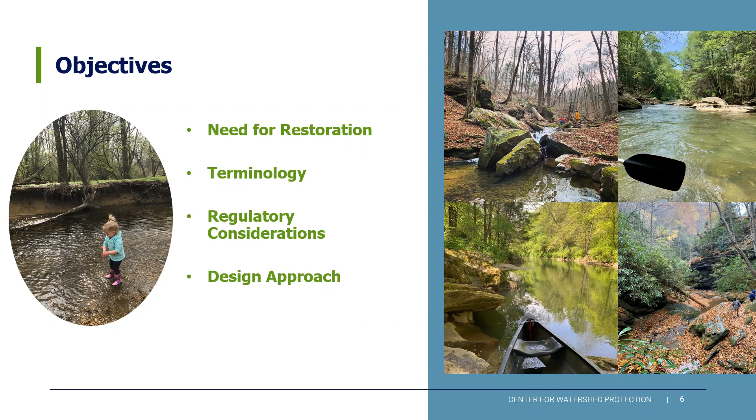And so our speakers will talk about the regulatory considerations and the design approach, what these types of projects look like, and what sites they might be landing on to suit a mitigation bank project.

And finally, to introduce our speakers, Dave Gorman is a water program specialist at the Pennsylvania Department of Environmental Protection in the Division of Wetlands, Encroachments, and Training, Bureau of Waterways, Engineering, and Wetlands. He's responsible for providing permitting and technical expertise on a wide range of issues involving waterways, wetlands, and floodplains. His recent work is focused on aquatic ecosystem restoration, mitigation banking, and aquatic resource research and monitoring. Dave has worked in the division since 1993 and has a BS degree in the biological sciences from Clarion University in Clarion, Pennsylvania. And I will go ahead and introduce Ward too, but he will be following Dave's presentation.

He's currently employed by Land Studies and Century Engineering, and is a professional engineer licensed in Pennsylvania and Maryland with over 30 years experience in stream stability and restoration. He's worked extensively in Maryland and Pennsylvania, completing designs and the implementation of stream and valley floodplain restoration projects, including watershed scale mitigation banks and those impacted by legacy sediments. These projects include waters with drainage areas over 30 square miles to smaller valleys with slopes greater than 20%. So we have two great experts that will be sharing their information today, and hopefully answering some of the questions that Allison posed earlier that some of the conservation partners are curious about.

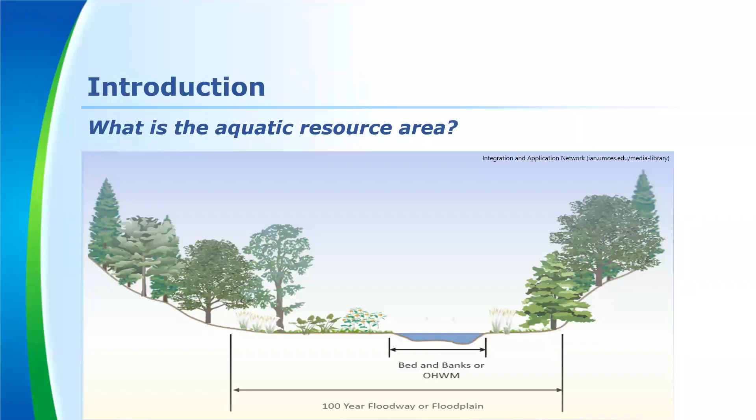So I like this slide because for a lot of people that aren't familiar with it, this has been a very difficult task for some people to grasp onto. We are in the process, or have been. It's been much more protracted, I think, than our program would like, or any of us would like. It's going on 2 decades now. 2/3 of my career has been spent dealing with this, and a lot of recalcitrance in understanding and moving to the trajectory or direction where we want people to move in terms of the science and the design approach.

But we're shifting away from just evaluating the conditions on the ground as a basis for requiring or defending or demonstrating the need for work. What we want to do is develop comprehensive restoration projects that go through an evidence-based approach. And one of the key factors to this process is identifying historic alterations to the valley. And it's not just the stream channel. In many cases, stream channels aren't even in the location they're supposed to be in. They're on the margins of the valleys. They may even be outside of the original floodplain, and they may be perched up on the valley wall in many cases. So understanding that historic context, the alterations, this is really the basis for our process.

And it's what we put bankers through. They've got to go and do good geotechnical work, investigative work, historical work, to understand what's happened to the stream and propose an approach that will address those degradation elements in order to meet the level of crediting to be awarded credits for restoration or rehabilitation. One of the principles of this is understanding the historic or pre-alteration valley, that paleo condition. I'll talk a little bit about that later, and I'm sure Ward will too. That really is important to understanding how the resource has been altered and the underlying causes as well. But it is a critical element to addressing and developing a comprehensive restoration plan for sites.

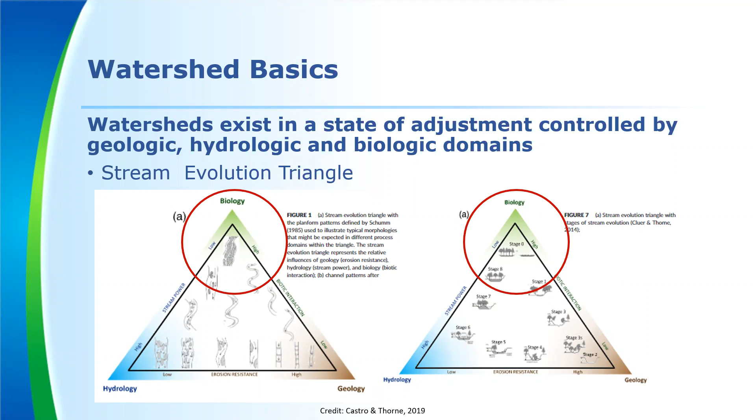That's huge. You're increasing by a third the ability of that stream bed to resist shear stress conditions that would normally cause transport of materials downstream. So they're stabilizing habitats, gravels, and smaller particles. That's a big deal when you start looking at habitat and functions.

So when we evaluate these projects, banking is comprehensive. The goal is to develop comprehensive projects that address the watershed and the underlying problems within a watershed. So we're looking at systems. We're looking at developing resiliency, and how you develop resiliency is through redundant pathways. Obviously, diversity and conditions, that can be a wide range of things. We're looking for diversity and ecosystem stability.

And all of these things are reflected in the paleo environment and the historic conditions. If you do the geotechnical work and the past work to look at what that system looked like before it was altered, that can be really informative. We're looking at retentive systems. These things retain carbon, nutrient retention, processing, transforming nutrients. So the nitrogen might come in inorganic, it leaves in a biological form, which is a completely different animal when it comes to aquatic resources.

Fine-grained sediments are retained, more variety, more heterogeneity of sediments. So you have more diverse habitats, more diverse conditions that a much wider range of biological communities can survive and thrive in. A big issue is retaining groundwater and baseflows. Reestablishing the hydrodynamic connectivity is paramount. That's where it all starts from.

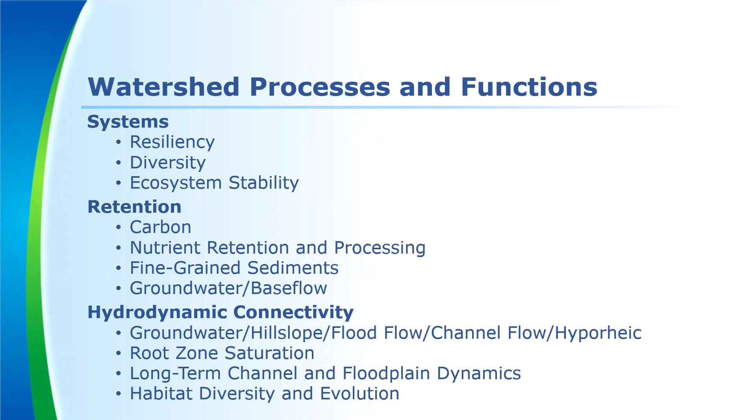The U.S. Army Corps of Engineers Research and Development Center, or ERDC, has identified over 60 functions associated with fluvial and stream systems. So there is a plethora of things related to fluvial systems, and most of those functions are outside of the stream channel. I hate to tell people that love stream channels, but it's about the broader fluvial system. It's not just about that in-stream, picturesque thing that everybody likes to drop their fishing line in. But we're also looking at long-term channel and floodplain dynamics. As I mentioned, diversity and evolution of habitat is really important.

Hydrodynamics, this is where it's at. When I evaluate a project from a banking proposal, these are the things that I really focus on in understanding how have the hydrodynamics been altered? How does the proposal address those alterations? And is it going to reestablish these?

I say they're on 3, it's actually 4 axes. There's longitudinal, horizontal, and vertical. There's also hill slope, which is kind of an independent process in smaller headwater streams. I don't have it listed on here. I think I included it in the horizontal or vertical. I can't remember which in the presentation.

So these are the underpinnings of evaluating degradation, alteration, and a design proposal. This forms and significantly influences almost all of the major processes associated with a fluvial system. And if you're not undoing the damage or the alterations done to these aspects of it, then your project is not likely to have the outcomes that you're expecting, which is full restoration.

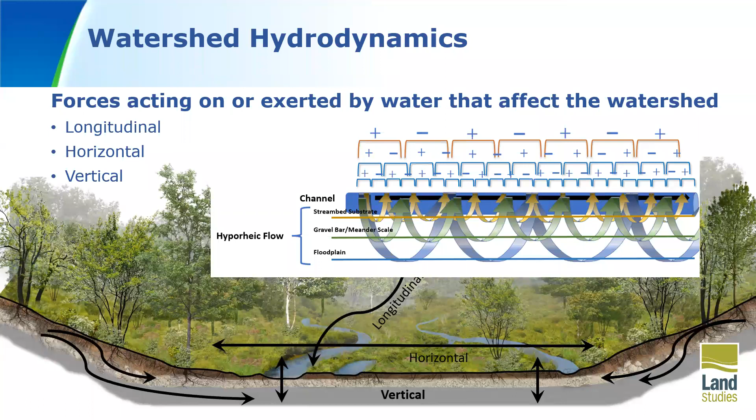I developed this to try to show you the complexity of hyporheic flow. People often think of hyporheic flow as just a vertical movement of water, but it's not. There's a huge horizontal and longitudinal spatial complexity to this. And this graph represents those different upwelling and downwelling points along and across a valley.

So you can think of these arrows in a two-dimensional space of along a valley and across a valley. You get a lot of different combinations of downwelling of water and upwelling of water. These are the biogeochemical hotspots that really transform nitrogen. And without this kind of complexity, you have a much reduced capacity to remove nitrogen from the system.

I remember most of the nitrogen, I know the models all use edge of field, edge of stream. In my experience and based on the science I read, this is all coming from the groundwater. The nitrogen sources are in the upwelling of the groundwater from the sides of the hill slopes or the broader valley walls. So if you don't have these complex processes restored and in place, you're going to have a much reduced capacity to deal with nitrogen altogether.

It's pretty much just going to keep passing down valley flow in the stratigraphy or in the groundwater that's not being treated. It'll just keep moving to the next larger system. So the other thing you notice, there's a lot of redundancy here, and that's a big factor in having healthy communities, healthy ecological processes, is redundancy. They can withstand a lot more perturbation if they have redundant pathways.

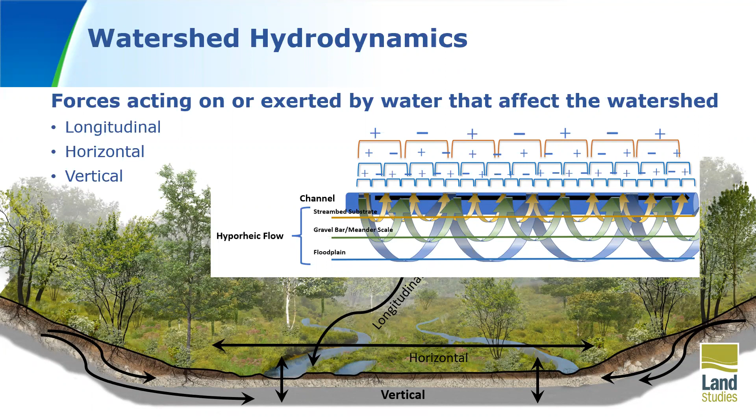Even if something happens to one pathway, you'll still have 3 or 4 different pathways that can take up the slack of that lost pathway. But at some point you oversimplify the system and you lose that redundancy, and then it becomes more of a linear process, similar to a structural BMP, more or less, which is very linear and has no redundancy to effectively process nutrients.

So as I mentioned, in summary, hydrodynamics, that's where the action's at when we look at things. But how do you look at those? You need to deal with geomorphology. Geomorphology is kind of that bridge between the physical and the biological world. That's where things happen. That's where you build these redundant systems, restore them, and understand the potential of a natural unaltered valley.

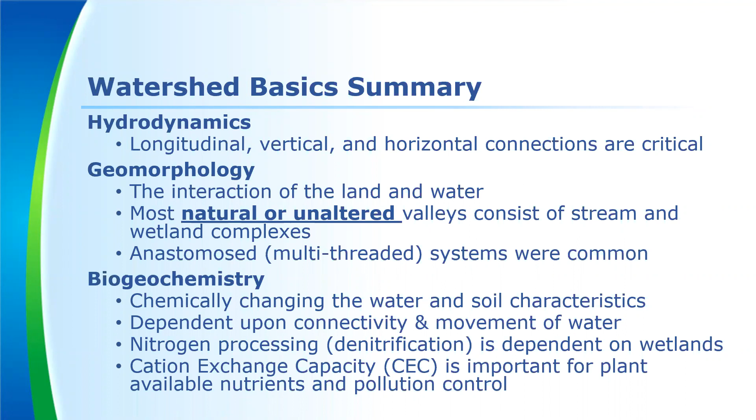And the biogeochemistry is a combination of everything together: biology, geomorphology, and water. Without all of those things acting together, you have much simplified biogeochemistry. And there's a lot of good research coming out on especially how headwater and midwater sheds are the progenitors or the generators of biogeochemistry that really influence downstream water quality conditions. Without looking at the headwater and midwater systems, your downstream waters will not likely ever recover chemically or water quality wise.

So watershed alteration. So this is what we drive these companies to, looking for characteristics that are divergent from historical stable systems. In this instance, you can see on the right, that's a typical legacy sediment. The legacy sediment is a light brown to tan material. As you move down, you see the black layer. That's the organic horizon, and the original hydric soil, and then the original gravels that are not supposed to be transported to a great extent are underneath that material.

But we look at breached dams. If you see here on this magenta line here, that's actually a historic dam that was breached. This is a tiny little headwater stream. And you can kind of see in the LiDAR form that it looks like a lake. And sure enough, that's what it used to be. It's a big, flat, broad field now.

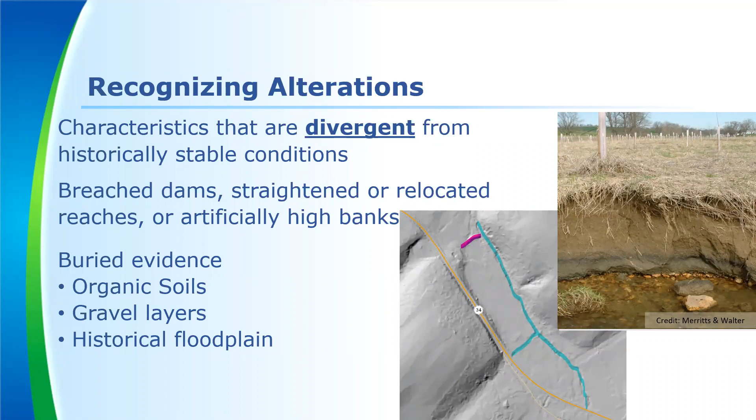You can see the light blue line is where the stream was relocated to the margin, maximizing agricultural use of that after dam breach. And then the tributaries that come in are head cut and ditched to effectively help drain the sediment that is there. Now these sediments are only 2 or 3 feet thick, but they still do the same thing as if they're 10 feet. They're burying the original wetlands in that valley.

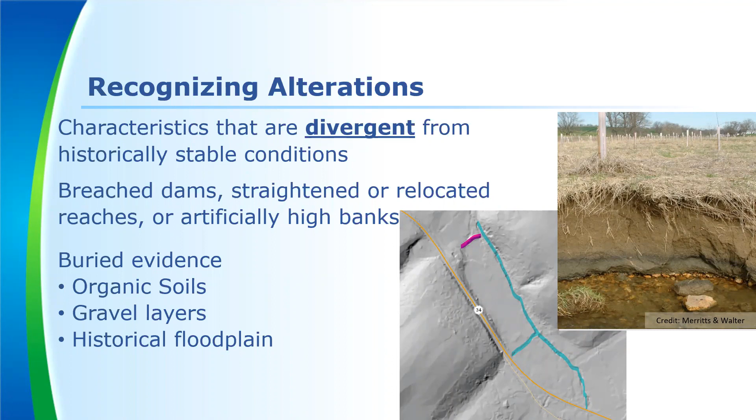In some cases, there's now houses on these, which is kind of scary to live there. But this is what we look for, these kinds of systems in small mid headwater streams. Obviously, you're familiar in Lancaster County with legacy sediment. We instruct bankers. A lot of bankers aren't from Pennsylvania. They come up here. So the ones that are, it's a little bit easier, but those are out of state. We really take time to educate them on looking for indicators.

Like the top imagery, these draped tree roots. Everybody talks about trees and vegetation stabilizing banks. That bank eroded back 10 feet. And I can tell you that whole floodplain is forested with 60-year-old trees. And those trees are not going to stop that bank erosion. This is what happens. It just keeps undermining, the processes keep working regardless of vegetation, because the banks are not natural. These are legacy sediments.

That's a 4 foot high, 5 foot high legacy sediment bank up in Perry County in the Ridge and Valley, for example. Same with buried stumps. If you see fragipans or ledges, clay ledges down where the stream channel is, or under the water surface elevation, that's probably the stream cutting back down to its original base level.

And what's really important to understand with these restoration projects is that base level controls, or the loss of them, are going to drive everything. And I think Ward will talk a little bit more about that. But that's where it's important to get back to how did this system lose its base level control, and how can we reestablish that control to reestablish the broader floodplain and systems that need to be there.

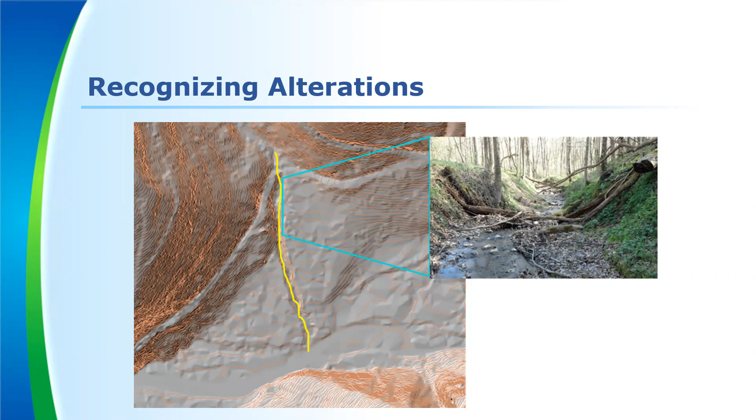This is a big chiller. Basically, it's a geothermal chiller. And so as water passes through that fan and ultimately comes out into the larger main stem stream, it's going to be at ground temperature, 46, 52 degrees. It might vary a little bit seasonally depending on how deep the fan is, but that's where your thermal regulation is, more so than through shading.

One other thing that often is missed is head cuts. Again, this is loss of base level control. This is an active head cut that's moving up through, in this case, colluvium. So this is an extreme headwater channel that barely had a channel in it, barely flows. You can see it in the back image. It's only a couple inches deep, and there's maybe an inch to 2 inch, 3 inch banks on the actual form. The vegetation root mat is thicker than the stream banks up top in reality.

This head cut started generating as a result of a culvert replacement. They over-excavated and didn't ensure base level control coming into the culvert was maintained. And so this head cut started propagating through this gentleman's property, and eventually it's going all the way up to the tree line up top. And I don't know, maybe it'll go further than that.

I don't know how far the stream goes, but this generates a ton of gravel and material downstream that fills the channel, which the township is now excavating on a routine basis, because all that gravel and silt coming out of there is going down there and depositing, because it was a wider, excavated channel. Now it's an ongoing maintenance issue.

But vegetation alone is not going to stop these head cuts. Eventually, this head cut will undermine those two trees on the right, and they will fall hopefully to the left and not to the right, because the guy's house is to the right.

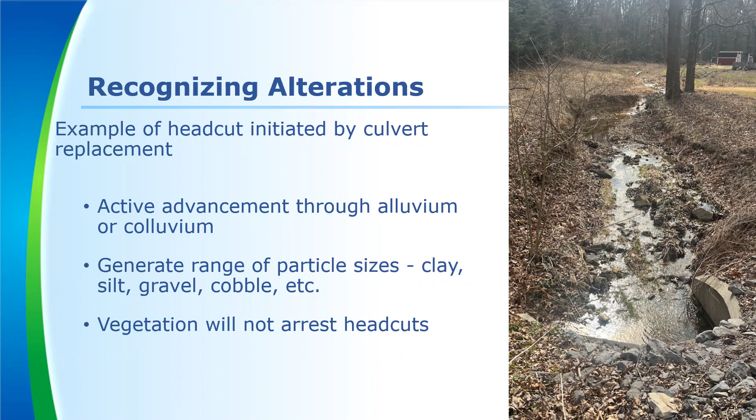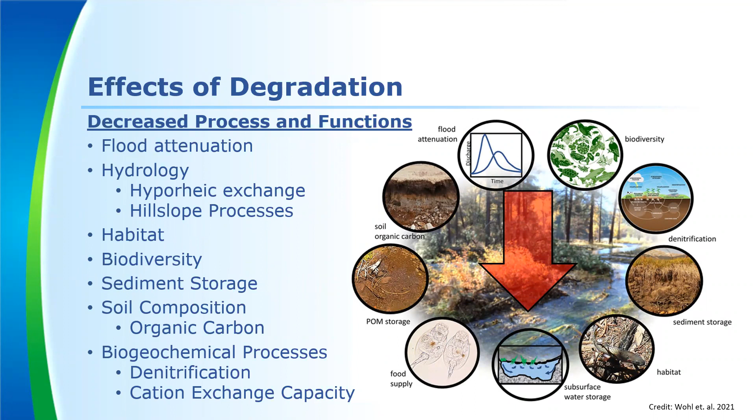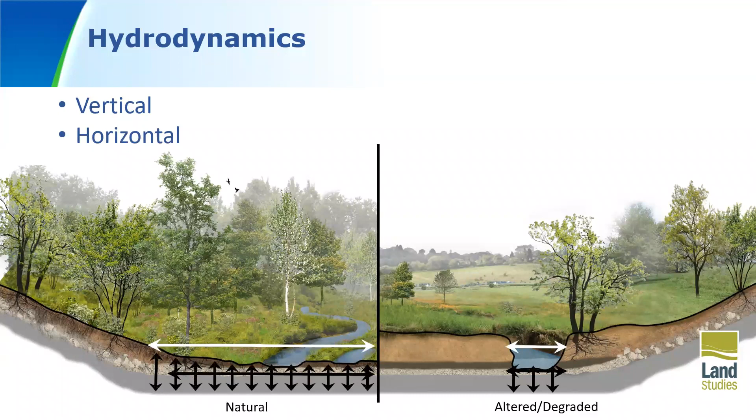I think I'm going to skip through effects of degradation. I think we've kind of talked about this a little bit already. Like I said, we are looking at understanding the hydrodynamics and how they differ between an altered and natural system. So we're looking at vertical, horizontal, longitudinal, but also in a lot of smaller systems, we're looking at hill slope

systems. When these legacy sediments are in smaller streams, oftentimes, as you see on the left, the hill slope arrows that come down, that water comes down and interacts with the valley groundwater, if it's present. If it's not, then it dominates the fluvial system.

If it's present when you have legacy sediments like on the right, what often happens is that legacy sediment presence caps the ability of that hill slope water to actually go and join the broader valley groundwater. And what happens is they express themselves on the back edge of the valley, right at the hill slope margin, and you'll get these little depression wetlands and wet seeps in those areas. Those are actually an indicator of legacy sediment presence.

And when we look and evaluate impacts, that's an altered condition still, even though those wetlands are present. What we might do is change the restoration category crediting to rehabilitation as a result of removing the legacy sediments, because those wetland acres would still be present regardless of the sediments.

So we changed the restoration reestablishment down to rehabilitation, because they're wetlands, but they're also highly altered because of the sediment presence. And by restoring the hydrodynamics, they're rehabilitating those wetlands back to their former functioning, which is an important thing. So that's how we can do these projects and look at them.

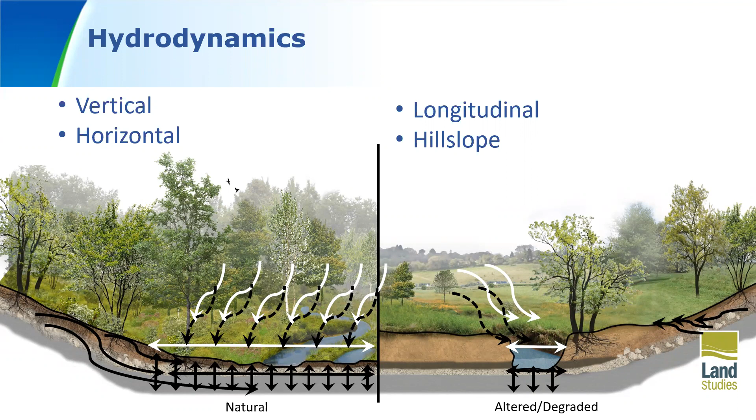Even though there's wetlands on these project areas, they're often highly altered and in response to the presence of the sediments. And when you remove the sediments, you end up reestablishing more acres of wetlands, as well as rehabilitating those minimal acres on the back areas. And I see those in forested. It doesn't matter if it's shrub or forested areas, those wetlands are present just about everywhere.

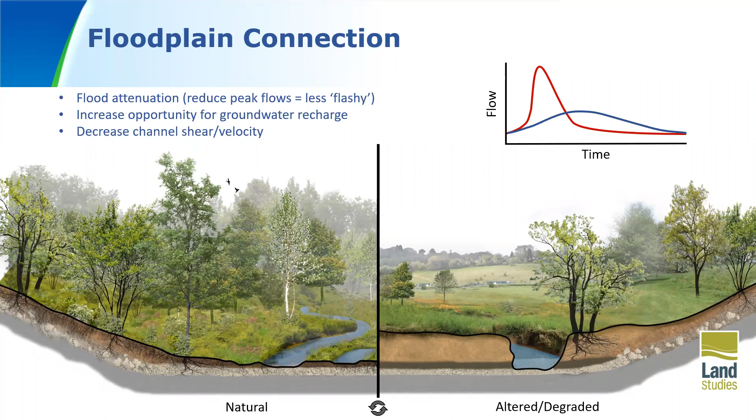One of the biggest things that we're learning from our work in Robinson Fork, which is a 500-acre mitigation bank where we're researching and doing a lot of work, is that these restoration projects, as was demonstrated at Big Spring Run, have a significant effect on flood attenuation and the hydrograph. They really can change to a significant extent how the hydrodynamics work with flood pulses and storm events, which also influences nutrient transformation as well. As I mentioned earlier, we're looking at exporting systems under altered condition, and we're looking to restore these retained systems.

If they don't, or there's constraints in the watershed that prevent that, it's not that the project can't be done. It can still be done. It may just shift how the crediting works. We may move from restoration or reestablishment into rehabilitation, or from rehab into enhancement as a result of constraining conditions.

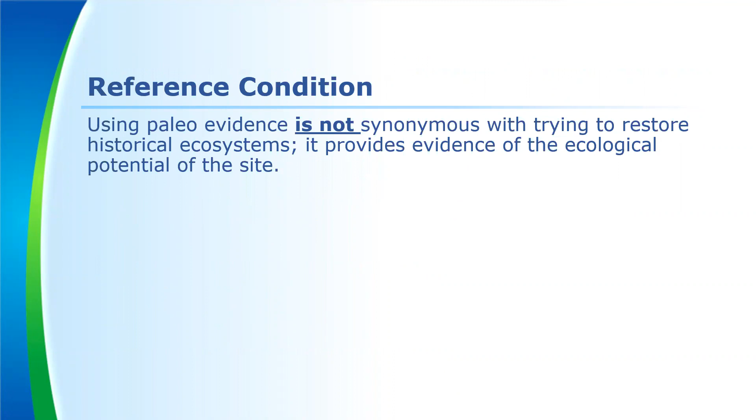The one thing I do want to touch on before I end is that understanding paleo evidence and historic condition is not synonymous with trying to restore historic ecosystems. That's a misnomer that's been propagated over and over again. What it does is provide evidence of the ecological potential of the site. And that's what you use to inform your target conditions and your design perspective. It tells you what's potentially possible at that site physically.

The biological and ecological aspects are a separate consideration, and we have developed tools to assist in community restoration, community development, and targeted planting. And we'll be providing training later this year on that.

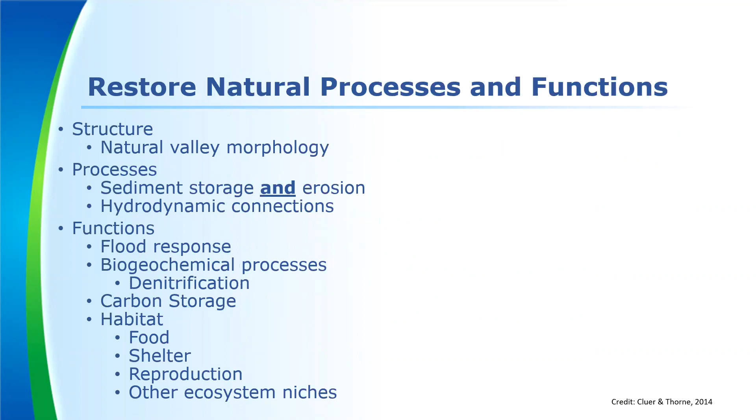This isn't an us versus them process. I think if all of the stakeholders and project proponents can come together and utilize terminology consistently in a standard evidence-based approach, using an evidence-based approach and standardized terminology will reduce conflicts among project proponents. But the other thing it will help do is improve the understanding of expected outcomes. People are expecting restoration of resources using certain BMPs because of the terminology that's used.

The public doesn't understand the distinction. But the reality is you're not going to get restoration. You might get some improvements or reduce pollutant constituents from entering a system, but you're not going to get restoration. And I think this has been a pervasive problem for many years, and obviously it's something that's not going to go away overnight either. That's it.

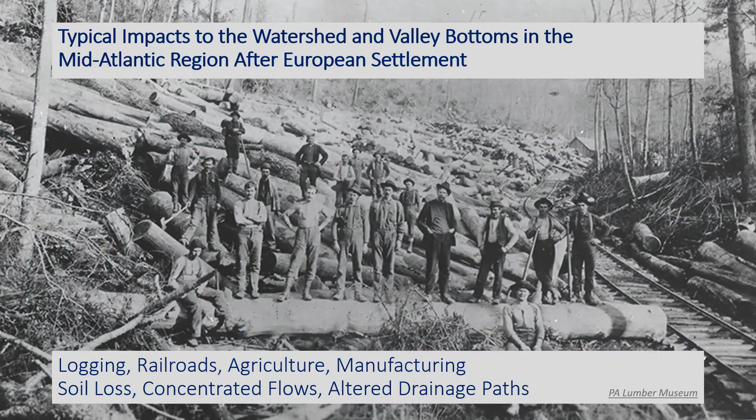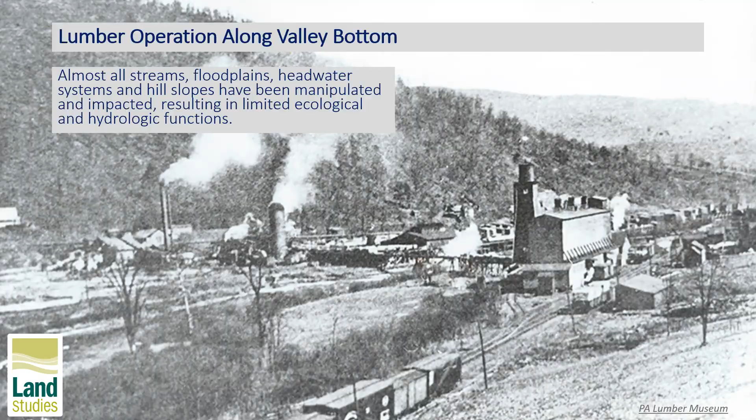As Dave alluded, pretty much all of the valleys and hill slopes have been altered historically, from logging, railroads, agriculture, you name it. As you can see in here, part of the logging systems occupied pretty much the valley bottoms. They were flat, they were available to use. They manipulated everything from the hill slopes to the headwaters to the larger river valleys. Agricultural practices were ubiquitous. So was ditching, straightening of the channels, relocating of the channels for agriculture. You had mining subsidence, and then you also had dams that would actually raise the valleys.

And that comes into play when you're deciding where your base controls are. Has your valley been raised? Has it been ditched? Is it draining the floodplain? Is it forming gullies? Where did your head cuts originate from? You had major increases in soil from logging to mining to agriculture. Same thing, pollutant and sediment inputs.

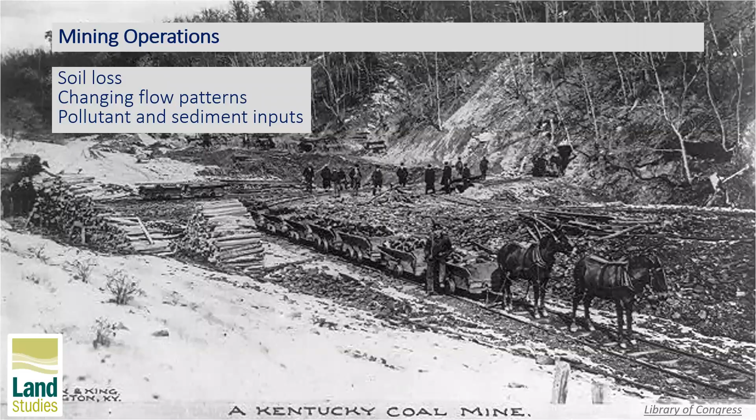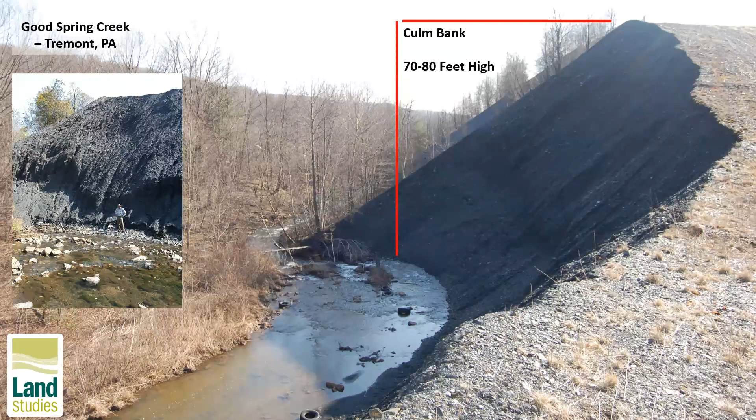In strip mining areas, streams start to migrate into some of the coal piles or the waste piles. You end up with a ton of sediment working its way down into towns and filling the bridges and the channels. Here's a coal pile that was over 1,000 feet long, 70 to 80 feet high. The stream was flowing into it. The towns, Donaldson and Tremont downstream, start to feel the effects of increased flooding due to all the deposition within that town.

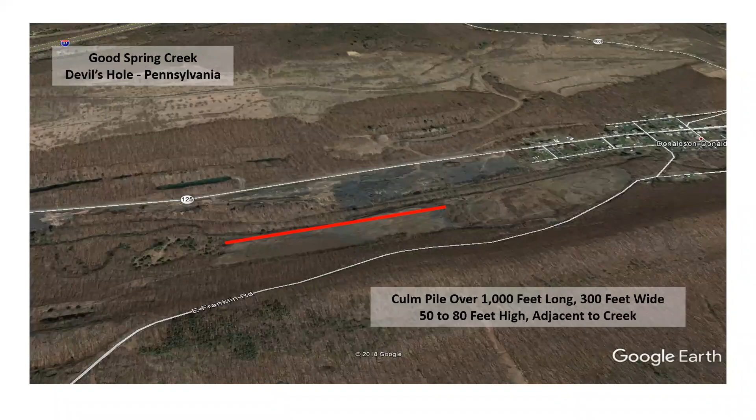As Dave alluded before, we have to understand the pre-alteration of the valley in order to really provide a comprehensive restoration. This could involve agriculture, mining, subsidence, dams, etc. What we realized then is we've got to do our homework, figure out what's going on with the subsurface, what's going on with the surface, and have a good idea of the watershed.

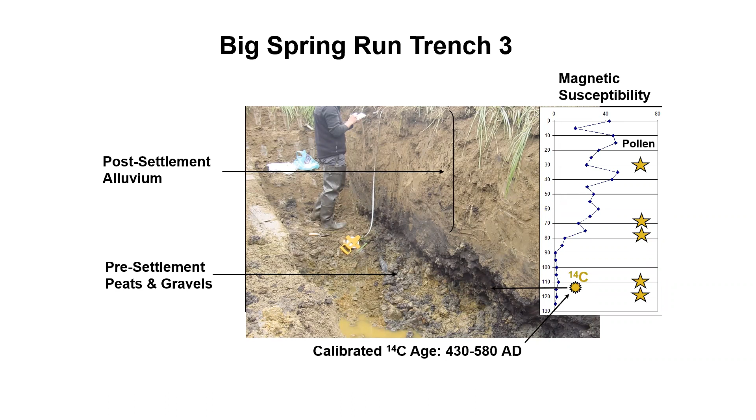On Big Spring Run, which is used as an example in many locations, you can see where we had the post-settlement alluvium. And as Dave indicated before, we have the pre-settlement floodplain and the gravels. They do pollen tests, magnetic susceptibility, carbon testing, et cetera, to get an idea of the age of the soils. This had occurred probably a decade to two decades ago. Not that we still don't do a lot of this, but there's a better understanding now than previously.

Things you see in the field give you an idea too that something's not right, when you have buried stumps that are 10 feet below the top of a bank. This is Little Gunpowder River; very close to this it's actually tidally influenced. Imagine how much sediment is making its way to the bay in that short distance.

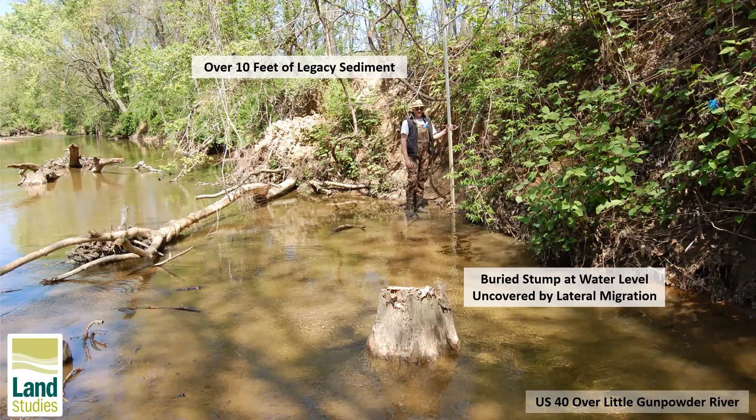You really don't have an idea of base level controls until you start doing your homework. You've got then your floodplain encroachments and your channel straightening and stream relocation, et cetera. So it takes an awful lot of information up front before you can go into determining a design for restoration of the valleys.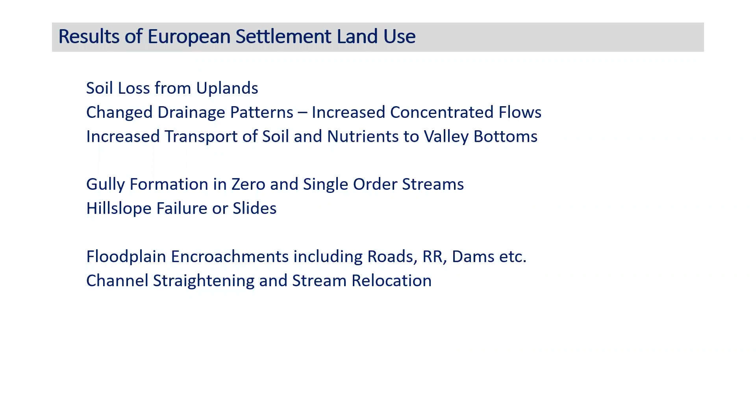Again, the top shows kind of the legacy sediment feature. Primarily, a lot of this was done with some type of floodplain encroachment with a dam or a roadway and a small culvert or railroad, which significantly increased the base level control for the valley, raised the valley. Then you get incision, and the channels actually incise much deeper into the bedrock area than they were previously due to high stress and high velocities.

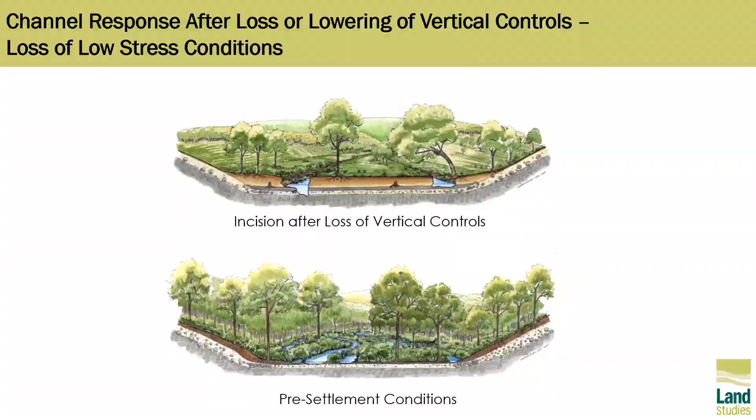Well, now we've got to figure out how to restore those functions, get the base level controls back, get the interaction, the hydrodynamics, the connectivity, et cetera. A lot of people think that it's just imperviousness that causes stream degradation. This is out in Frederick County. We had major long-term bed degradation through this county.

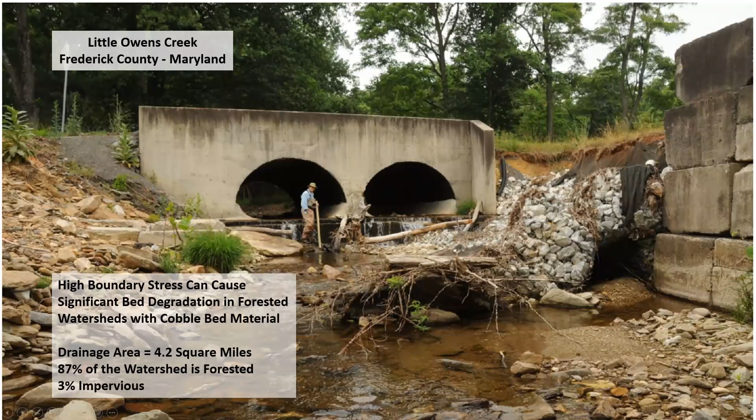The chart right here indicates the long-term bed. To the left is feet; we measured how much long-term bed degradation had occurred as a research project for Maryland State Highway for their bridges and culverts and fish passage. And then to the bottom, you have the impervious area. Well, you'll see that major degradation occurs where the percent of impervious area is least. A lot of people don't understand why.

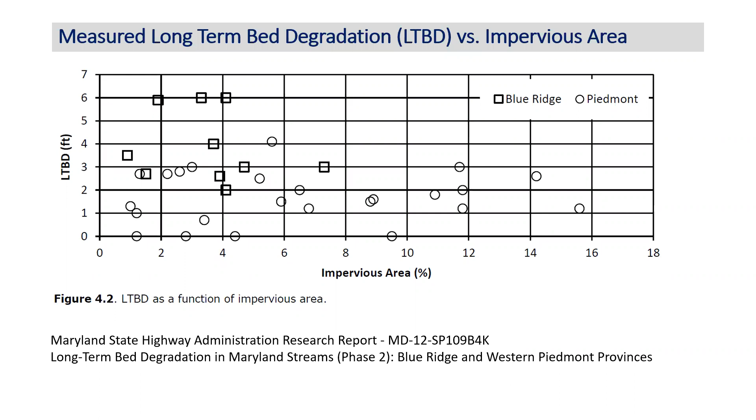What happens is, as the impervious area increases, you end up with more roads, more culverts, more utility crossings, more impacts across the channel that actually stop the long-term bed degradation from getting deeper and deeper because you have nick points. You drop a culvert, then you end up with that head cut continuing to migrate upstream. This is stream evolution.

Once you start getting bed degradation and incision, your higher velocities, your higher boundary stresses, then are transporting and eroding. You get lateral migration. You get an evacuation of the soils and the nutrients. You get a constant, I'm going to say, disturbance of your epifaunal substrate. And by the time you get finished, you end up having the stream migrating, removing the majority of the sediments and going back to a zero order system.

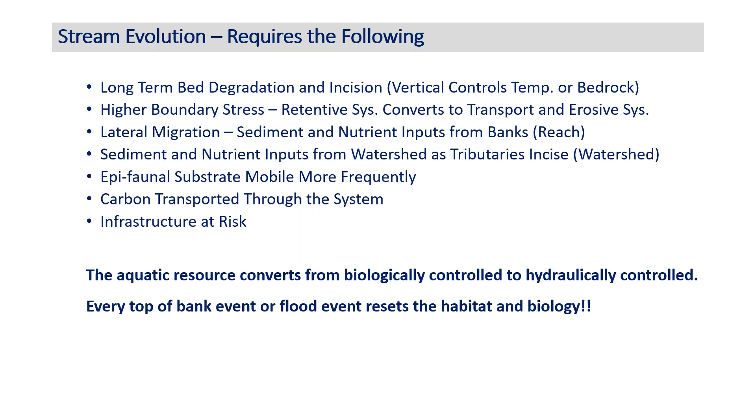All right, so watershed scale restoration may very well require a wide variety of drainage areas and streams within it, including the uplands and the hill slopes. As you can see, what we're looking at for restoring those functions on a watershed scale, we want to understand what's happening with the uplands, what's happening with the hillside seeps and the zero orders, the narrow and wider valley systems, and the larger drainage areas.

Included in that are transition zones too, like alluvial fans, or we've got to worry about how we're transitioning upstream and downstream of the properties and whether we have a high bed load system coming in or not. What we're typically trying to do in most cases is provide low stress design techniques to create a retentive system like David talked about, where we're retaining the carbon, the biology, the sediment, you name it. We want to hold everything in place.

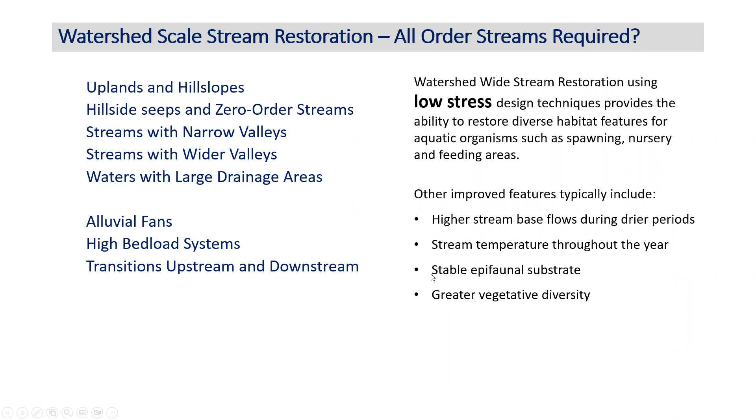And then the other features that we're trying to improve or restore: a longer duration of base flow, higher base flows, a more consistent temperature, whether it's cooler in the summer or warmer in the winter, a stable substrate for spawning, etc. And then obviously greater vegetative diversity is featured.

So the uplands and the hill slopes, we're trying to possibly reduce or replace lost soils and nutrients. Sometimes when we take the legacy sediment that's formed in the valley, we can reapply it to the hill slopes and the watershed for agriculture. Habitat will restore meadows, especially in locations where bedrock is shallow, buffers, use it for contaminated lands, etc.

The hillside seeps and the zero order streams. These waters typically are found in silty soils. They're not usually what you would call substrate or conditions where you will have a single order stream. Many times there should actually be just a wetland or a marsh, not necessarily even having any type of channel within these systems. They provide vertical control.

They provide retention for carbon, for water, which is important to the base flow, sediment, etc. They process a lot of nutrients, and then they provide a lot of groundwater storage for a longer duration base flow to the larger waters.

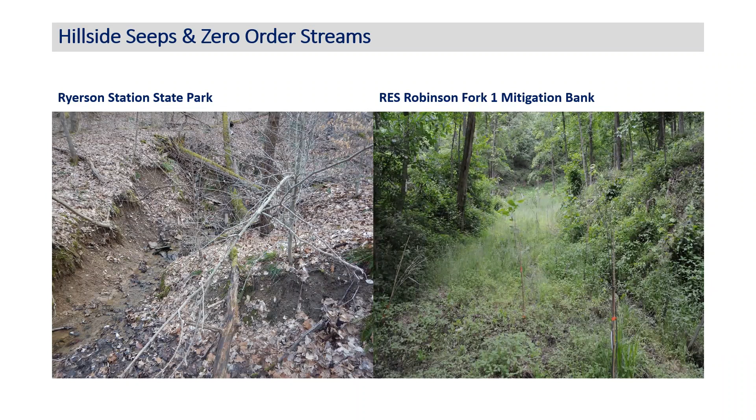On the left, you'll see a gully that's forming within a zero order system. And to the right, we actually raised that gully about 8 feet through this tributary. There is a channel going through there. Preferably, there shouldn't have been a channel. We would have rather loaded it up with woody material, but because it was a mitigation site and channel length was required, we ended up putting a small channel within that system.

The steeper systems that have narrow valleys, maybe it might be half a square mile to 3/4 square mile, 1 square mile, somewhere in that area, with subsidence occurring, where you might end up with parts of the valley dropping 4 or 5 feet. You end up with a much steeper, narrower valley than what you may have had naturally. Now we've got to worry about how we're keeping the groundwater up on the surface, our base level controls, our vertical controls. Are we using colluvial material, bed material, logs, etc.?

We prefer to try to use base off of bedrock, that's what the groundwater, the aquitard is, try to get a substrate in there to provide for the substrate, epifaunal substrate, etc. Again, you've got the retention issues. We're trying to retain everything from the sediment, groundwater, carbon, etc. The slower we release it, the more biology we get, the easier it is to keep the invasive vegetation out as long as it's wet and saturated.

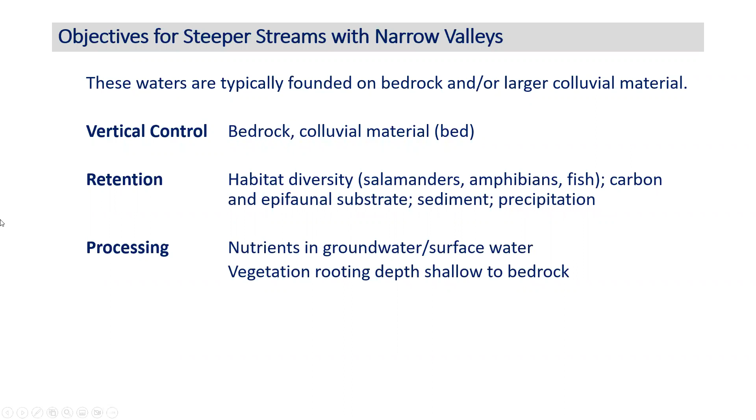This was to the left, Polly Hollow. This system actually did go through some subsidence. You can kind of see there's hill slope failures going on through here. To the right is how we would typically restore one of those steeper, narrower valleys. You can see a lot of the cobble, the bedrock associated with it. We put log controls in, etc.

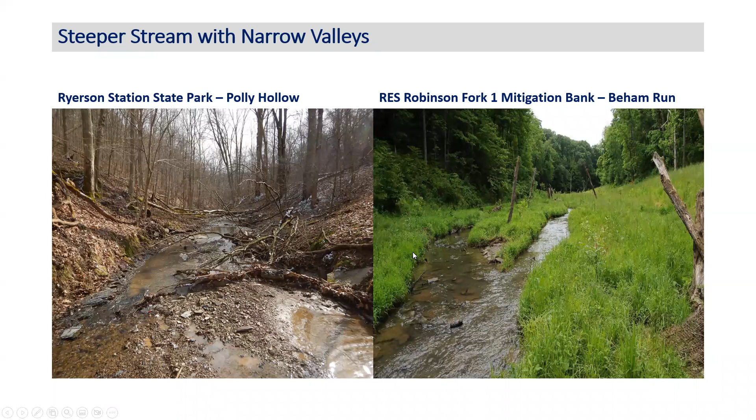Streams with wider valleys, a little easier to deal with. Vertical controls may also have included beaver. The habitat diversity, you've got an awful lot more water. You have a lot more area to really take advantage of the salamanders, the substrate, the spawning, etc. There's also a lot more nutrients being processed in those wider valleys. Because they're nowhere near as steep, you get an awful lot more retention and processing. And then you typically end up with an awful lot more diversity within those areas.

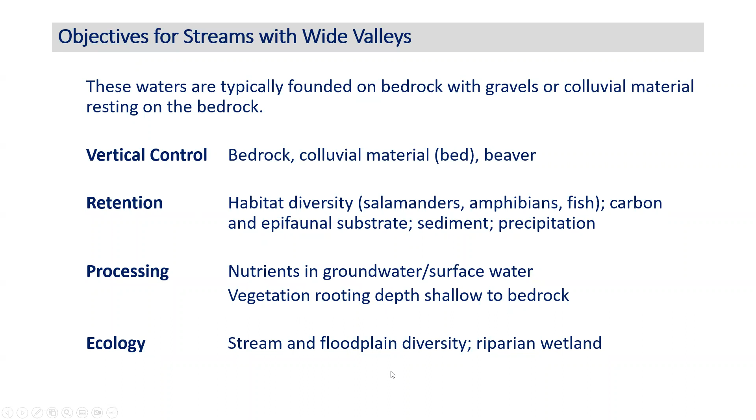This Ryerson Station, this Kent Run, this is about a 3 square mile watershed, and Beham is very similar. To the right, that was part of that mitigation bank, that RES Robinson Fork mitigation bank.

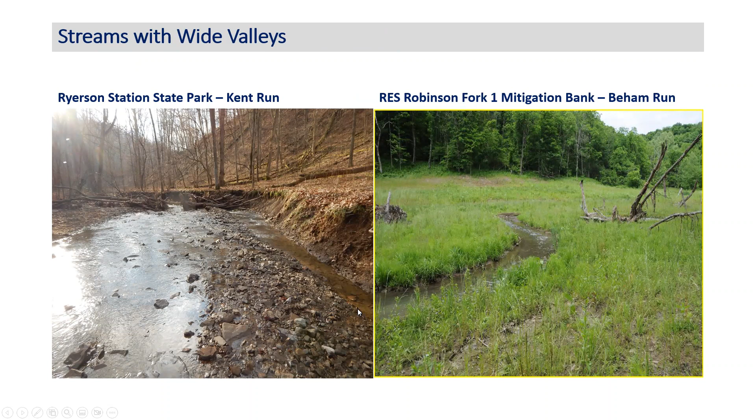The larger drainage areas I'm going to say are typically somewhere above 5 to 7 square miles. Again, the vertical controls, that's what we're looking at. The retention, the diversity can be excellent through those areas. But then we also now are trying to provide recreation. It may not necessarily have been part of the reestablishment, but where we are today, we're trying to include fishing, kayaking, etc.

Ryerson Station to the left is where they had to breach a dam. It's 33 square miles. We're in the process of putting a design restoration package together for permitting. Robinson Fork in this location is about 13 square miles.

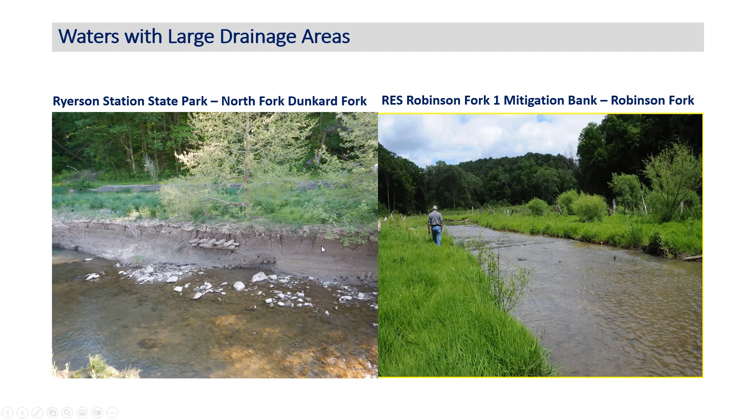Then we end up with alluvial fans, which, as Dave indicated, are very critical for the groundwater and the processing. But they're also extremely critical to maintaining base controls for the steeper slopes and the hill slopes. If they start to get ditched or incised, then you end up with an awful lot of sediment supply and possibly nutrients entering the system from the hill slopes and the gullies.

These alluvial fans are typically steeper than the headwater streams and obviously much steeper than the valley that they're tying into. And they can be, I'm going to say, a challenge trying to put together. This is an alluvial fan. On the left, you can kind of see the head cut and the gully just forming upstream of it. It's not quite as incised, but that head cut will go quickly because they're also typically pretty steep.

On the right, you can see how we designed a trib leading into an alluvial fan at the bottom within the Robinson Fork. Typically, they need to be relatively wide or controlled with a large type of material. The area to the left, once the alluvial fan got into the valley of the larger Robinson Fork, you end up with an awful lot of, I'm going to say, habitat for fry of the year and fingerlings, etc., through that thick vegetation cover. And a lot of it might have to do with the cold water coming out of that fan down into the larger valley.

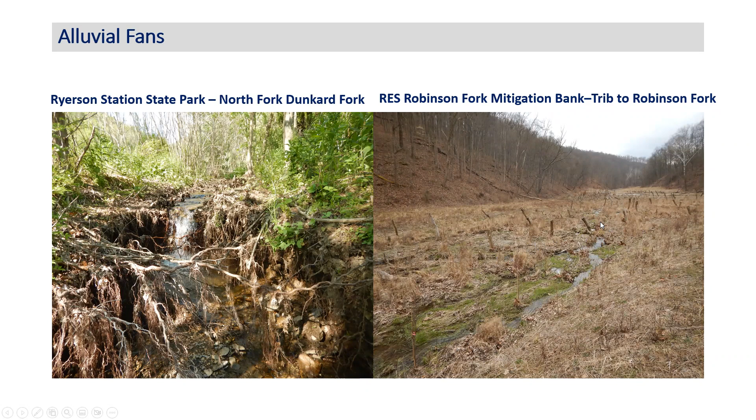The transition is one of the last things that we need to actually try to look at. We've got to try to make sure that upstream of our project site, there's not significant change in stress. On the downstream side, it's usually easier. It creates kind of a backwater condition. We may be able to do different things.

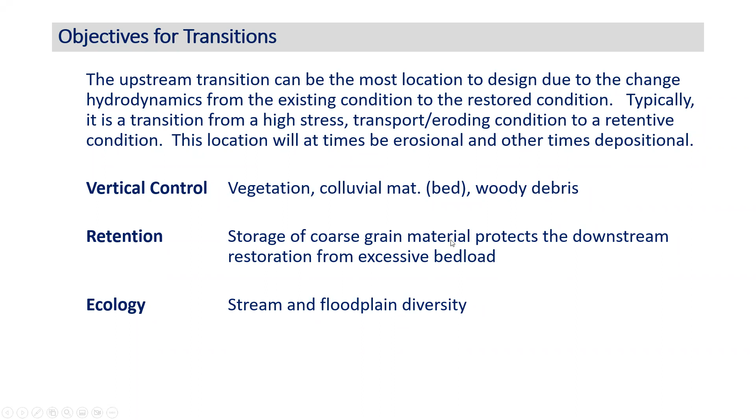The restoration site as a whole is pretty much improving the downstream waters because we're retaining a lot of the bed load, a lot of the silt, and a lot of the nutrients are being processed within our site. So primarily, I would say the upstream transition zone and what the objectives would be are more important.

Prior to a very short, I'm going to say, stabilization project, the large bar was forming at the bridge structure and the stream was eroding into the roadway embankment. What we did was go up far enough to develop a sediment storage zone. And this bed load was not actually coming from the main stem, but it was coming from a tributary that had been relocated and incised on a hill slope.